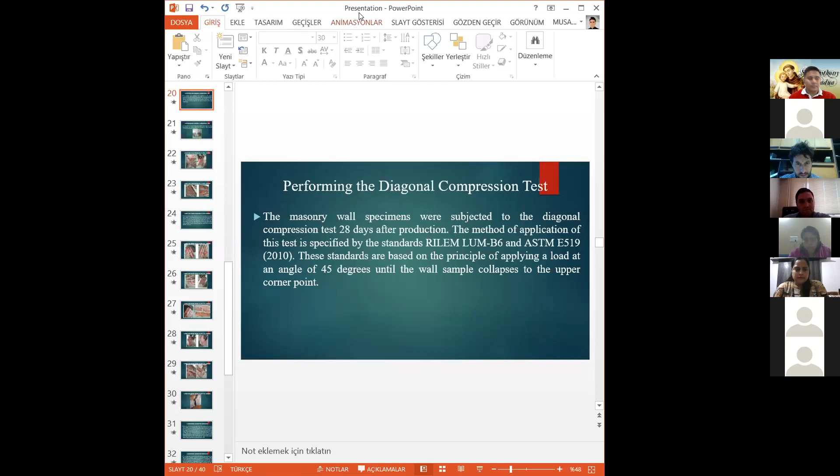The effect of using steel fiber in joint mortar on the failure behavior of masonry walls. I'm Musa Yetkin, research assistant and PhD student at Fırat University in Turkey.

Paper title: The Effects of Using Steel Fiber in Joint Mortar on the Failure Behavior of Masonry Walls, by Musa Yetkin, Yusuf Calayır, and Kürşat Esat Alyamaç.

Abstract: Masonry structures are the structural system in which the walls are load carrying. These structures have a brittle behavior due to the materials that make them up. For this reason, masonry structures or walls exhibit a sudden fracture behavior under lateral loads such as earthquakes. Due to this behavior, many masonry structures have collapsed from the past to the present under earthquakes, and accordingly, loss of life and property has been experienced.

This situation reduced the confidence in masonry structures, and thus the interest in constructing masonry structures gradually decreased. In the study, microsteel fibers were used in joint mortar to reduce the brittleness of masonry structures or to delay their sudden collapse.

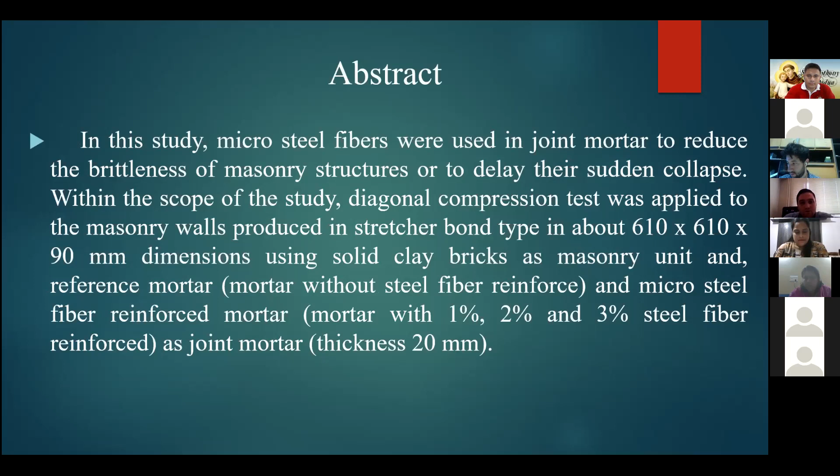Within the scope of the study, diagonal compression test was applied to masonry walls produced in stretcher bond type, using solid clay bricks as masonry unit and reference mortar and microsteel fiber reinforced mortar as joint mortar, with thickness 20 mm. As a result of the test, the behavior of masonry walls was compared with each other in terms of crack shapes and collapse patterns.

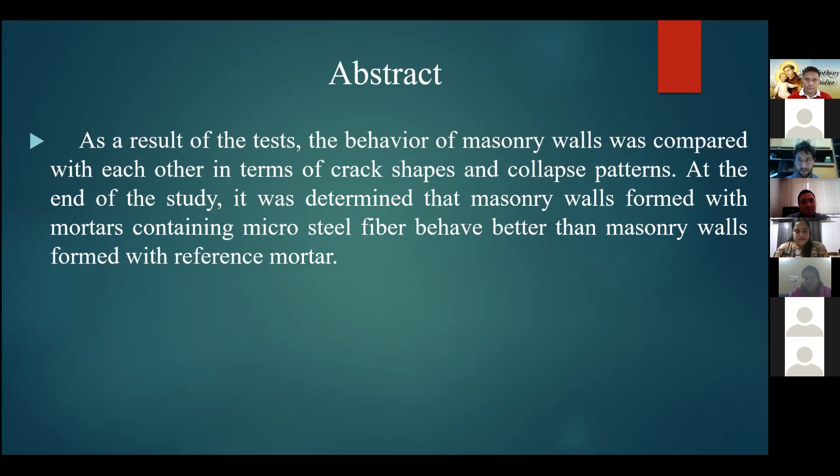At the end of the study, it was determined that masonry walls formed with mortars containing microsteel fiber behave better than masonry walls formed with reference mortar.

Firstly, masonry structures are the oldest structural types that have an important position in human history. These traditional buildings, which have emerged as a result of thousands of years of structural culture, have survived to the present day since they are produced with materials resistant to external influences, and have facilitated our knowledge about their technologies.

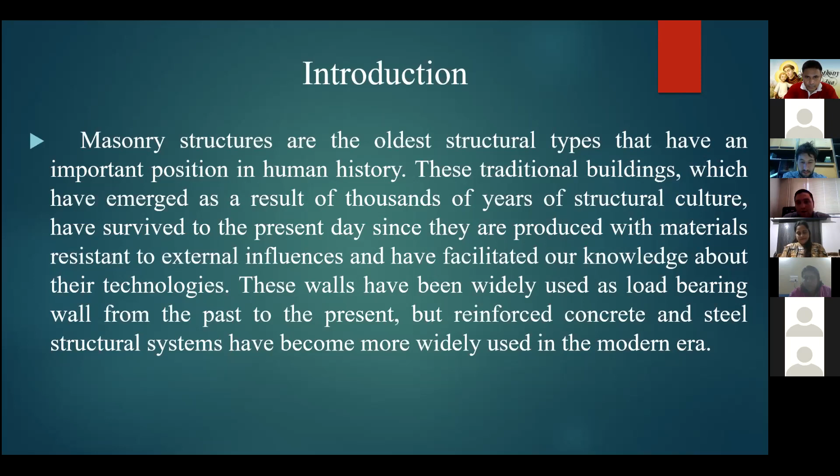These walls have been widely used as load-bearing systems, evolved from the past to the present, but reinforced concrete and steel structural systems have become more widely used in the modern era. Figure: the oldest known structure in history, Göbekli Tepe Temple, Şanlıurfa, Turkey.

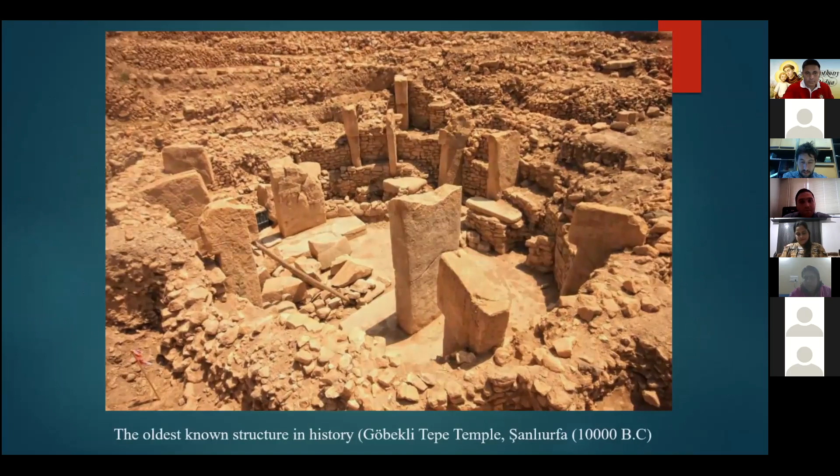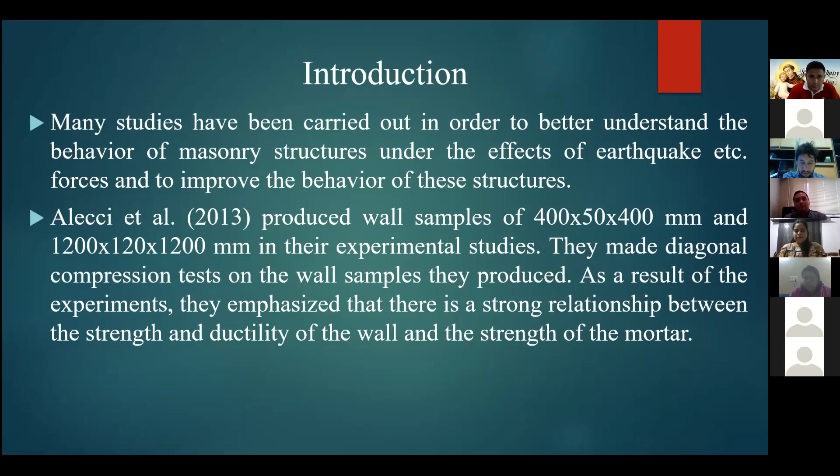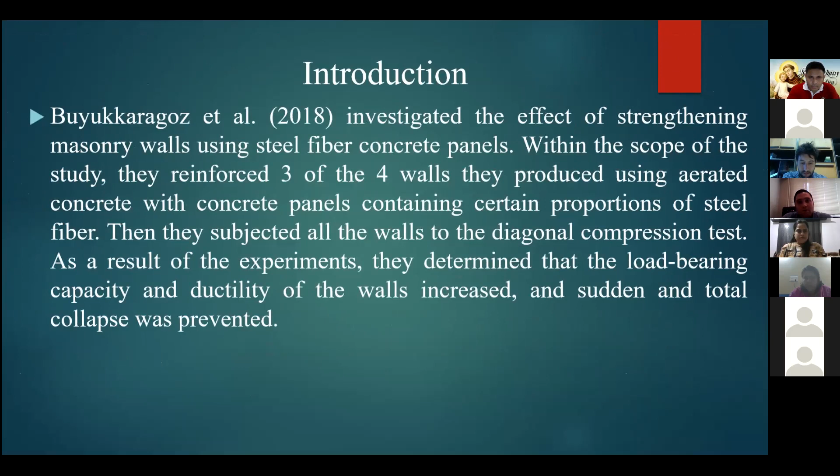Many studies have been carried out in order to better understand the behavior of masonry structures under the effects of earthquake forces and to improve the behavior of these structures. For example, Alecci and Shermi, Dubey and İlki et al., Buyukkaragoz et al., and Mezra and Özsayın, etc. These studies have shown that the improvement of mechanical parameters such as maximum load displacement capability, load carrying capacity, and shear strength that masonry structure can carry is a subject that has been studied and attracted by researchers.

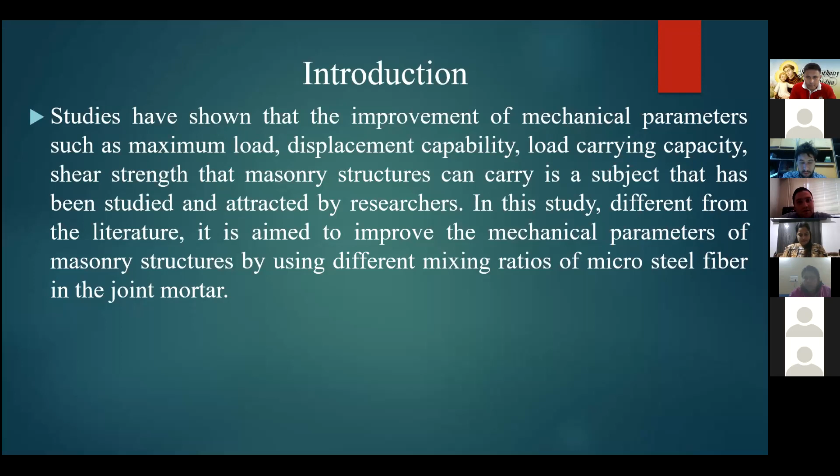In the study, different from the literature, it is aimed to improve the mechanical parameters of masonry structure by using different mixing ratios of microsteel fiber in the joint mortar.

Within the scope of the study, physical and mechanical tests of the materials—brick, sand, cement, microsteel fiber—that will form the masonry wall were carried out. Later, masonry walls were produced using these materials. These walls were subjected to the diagonal compression test after 28 days.

In the process of forming the masonry walls, solid clay bricks were used as the masonry unit. Compressive strength of bricks was determined, along with water absorption and the unit volume weight.

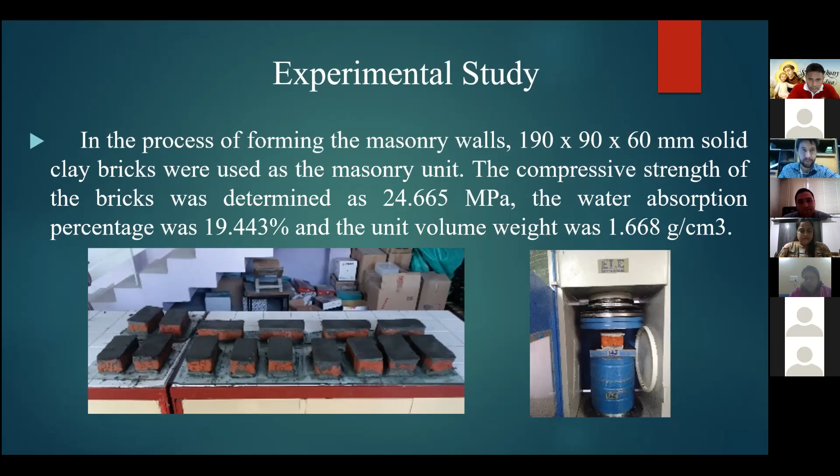Figure shows masonry solid clay bricks in the compression test. Cement, sand, and water were used to create the mortar, which is the material used to form masonry walls by connecting the bricks together.

The mixing ratios of the mortar were chosen as 1, 4, and 0.62 for cement, sand, and water respectively.

In the mortar, CEM I 42.5 R type cement was used as cement, and 0 to 4 millimeter aggregate diameter sand was used as sand. The density of the sand used and the water absorption percentage were also determined.

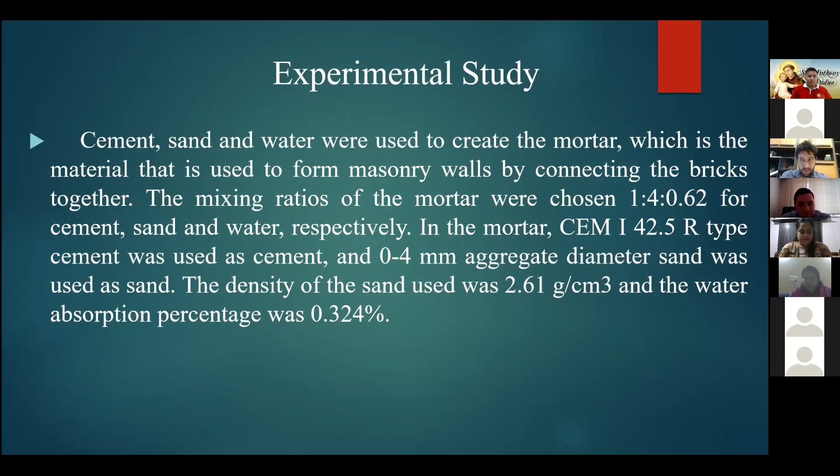In the experimental study, microsteel fiber was used in certain mixing ratios in the mortar. Mortars that don't contain any fiber additives were accepted as reference mortar, and the mortars formed with microsteel fiber at percentages of 1, 2, and 3 were labeled FM1, FM2, FM3. Different mixing ratios of microsteel fiber were used, and the properties of the microsteel fiber used in the study are given in the table.

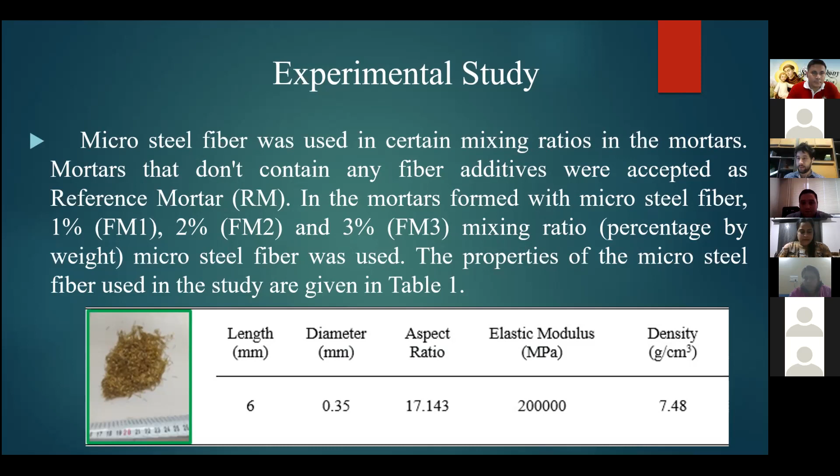The masonry walls were produced using solid clay bricks in the stretcher bond, a single row of approximately 610 by 610 by 90 millimeters. The thickness of the joint mortar for the masonry walls is chosen as 2 centimeters, both vertically and horizontally.

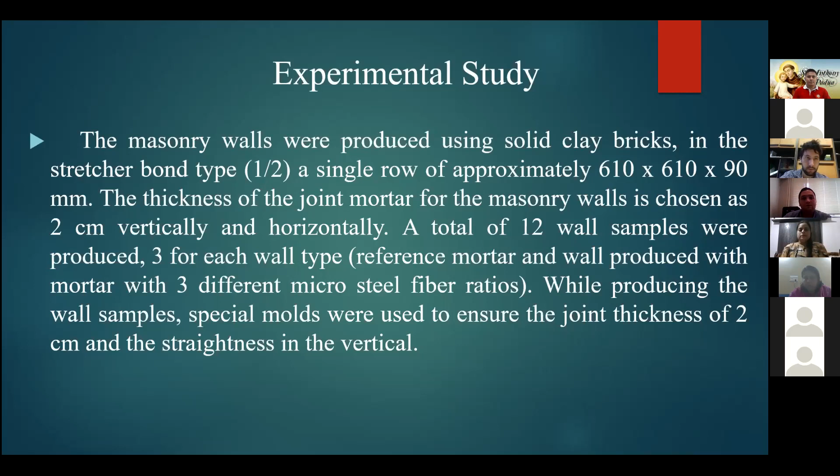A total of 12 wall samples were produced, 3 for each wall type: reference mortar, and walls produced with the 3 different microsteel fiber ratios. While producing the wall samples, special molds were used to ensure the joint thickness of 2 centimeters and straightness in the vertical direction.

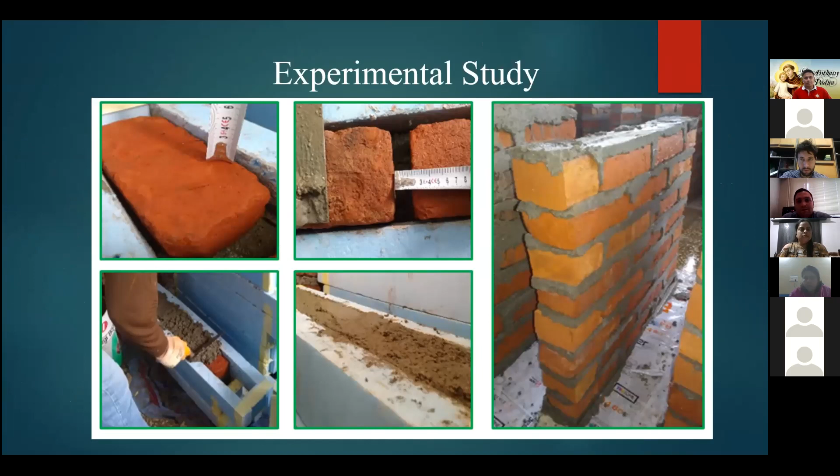Masonry wall specimens in figure. The masonry wall specimens were subjected to the diagonal compression test 28 days after production. The method of application for this test is specified by the standards RILEM and ASTM. The standards are based on the principle of applying a load at an angle of 45 degrees until the wall sample collapses at the upper corner point.

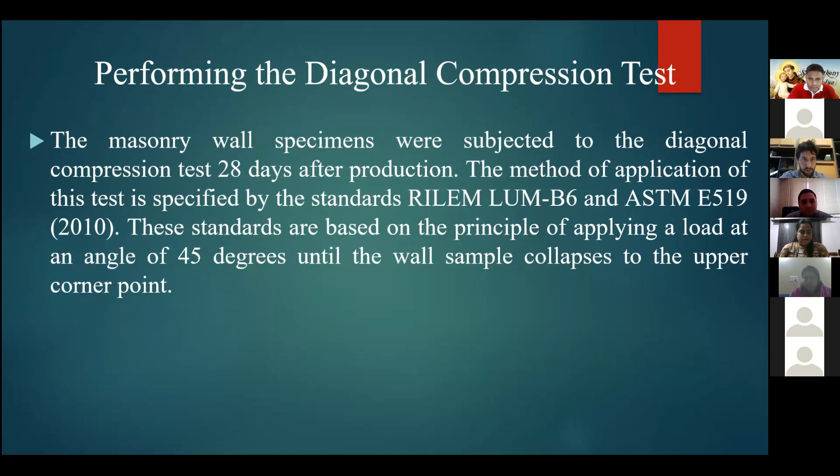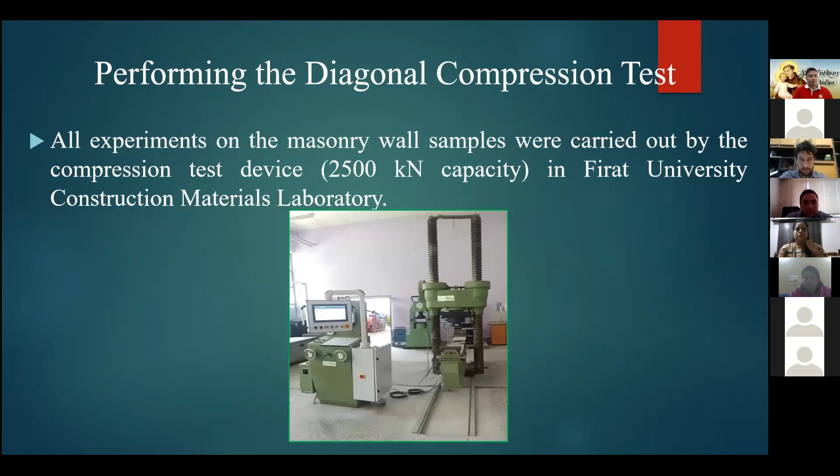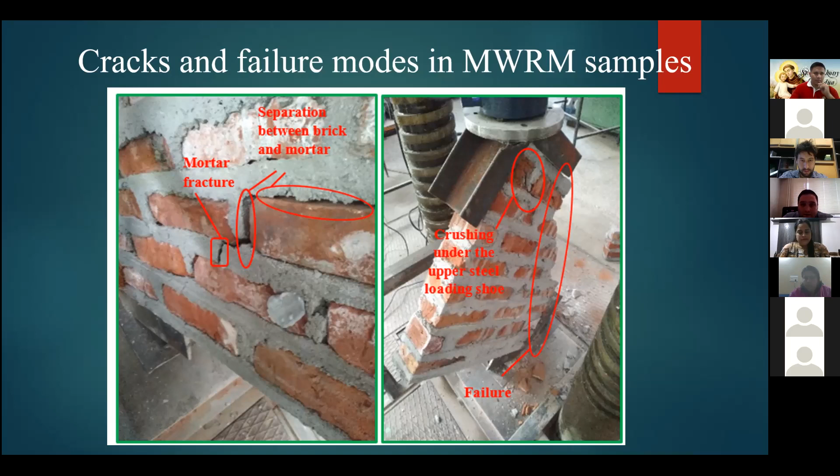Excuse me, sir, you still have 1 minute remaining.

Yes, of course. Diagonal cracks, bricks fracture, and separation between brick and mortar were observed. When the masonry produced with reference mortar was examined after loading, it was determined that cracks occurred along the loading direction on the walls. There were crushes in the brick and mortar at the steel loading shoe where the load was applied, and separations between the joints and the bricks.

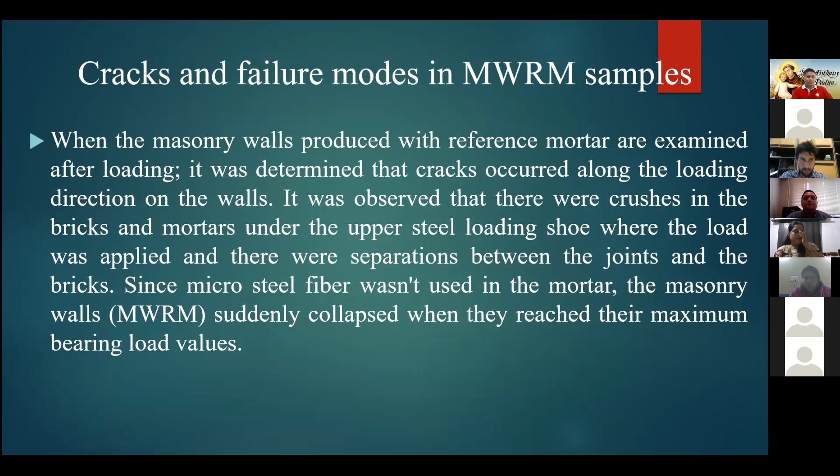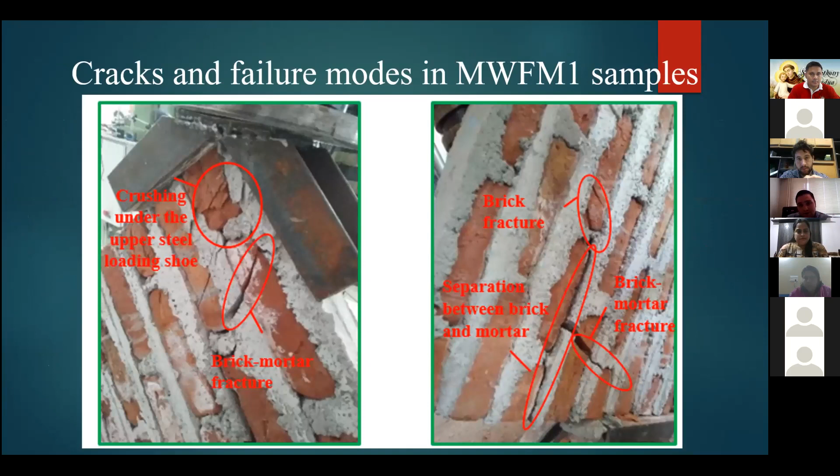Cracks and failure modes in MWFM1: crushing under the upper steel loading shoe, brick mortar fracture and brick fracture, separation between brick and mortar, brick mortar fracture, and partial diagonal cracks.

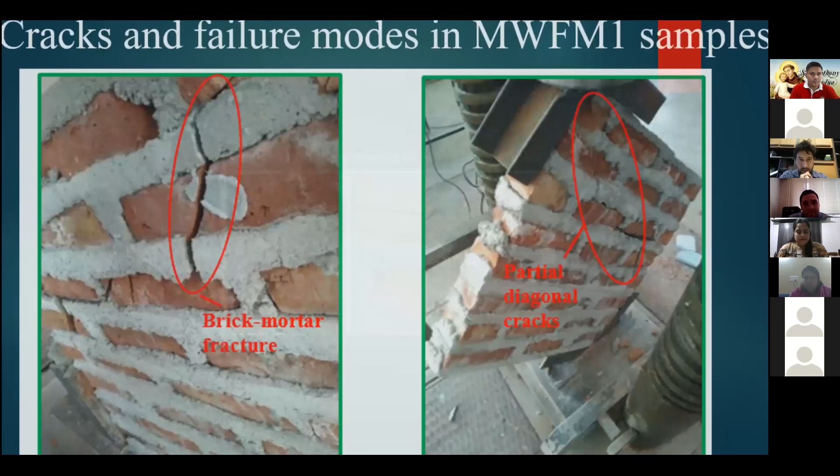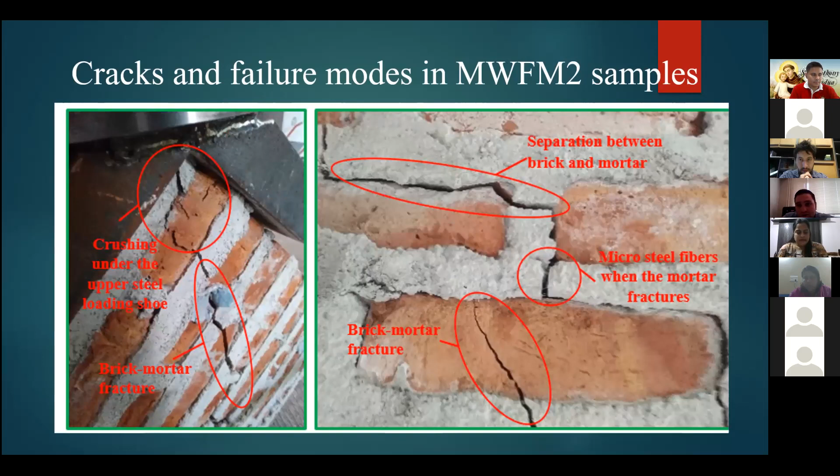In MWFM2 samples: crushing under the upper steel loading shoe and brick mortar fracture, and microsteel fibers when the mortar fractures, separation between brick and mortar.

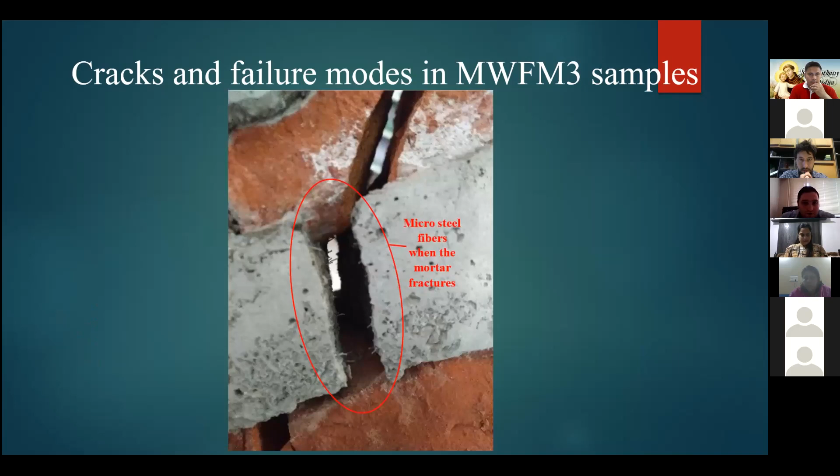In MWFM3: brick mortar fracture, partial diagonal cracks, brick fracture, and microsteel fibers when the mortar fractures.

When the walls formed with microsteel fiber mortars were examined after loading, it was observed that cracks occurred along the loading direction in the walls, but as the amount of fiber in the wall increased, the length of these cracks decreased. The cracks didn't extend from the upper steel loading shoe to the lower steel loading shoe. There were separations between the joints and bricks in some parts of the walls. However, since microsteel fiber was used in the mortar, the samples didn't suddenly fail, and no separation was observed on the walls.

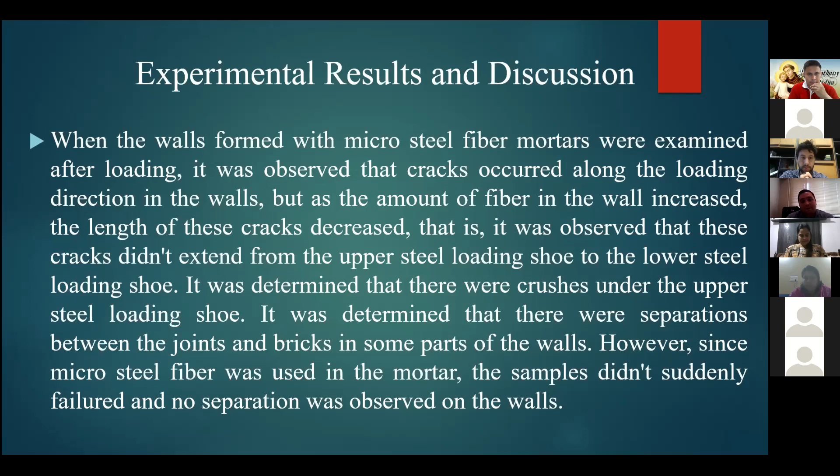Conclusion: within the scope of the study, it was aimed to increase the load carrying capacity of masonry walls and to prevent total collapse by adding microsteel fiber in a certain mixing ratio into the joint mortar in masonry walls.

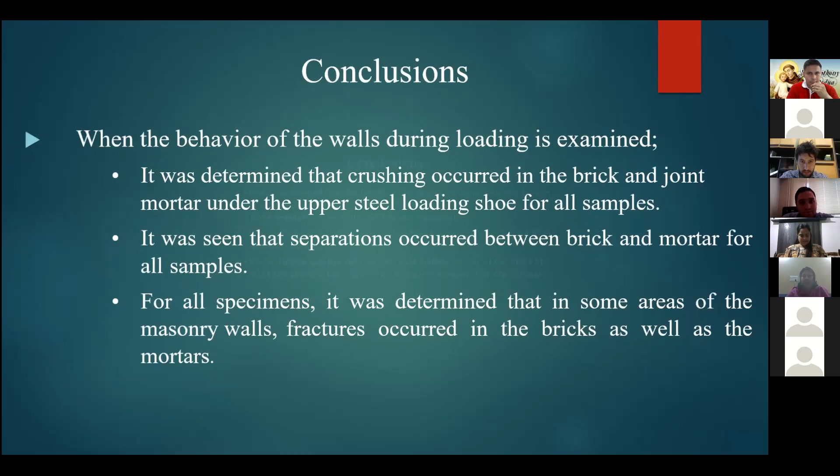When the behavior of the walls during loading was examined, it was determined that crushing occurred in the brick and joint mortar under the upper steel loading shoe for all samples. It was seen that separation occurred between brick and mortar for all samples. For all specimens, it was determined that in some areas of the masonry walls, fractures occurred in the bricks as well as the mortar.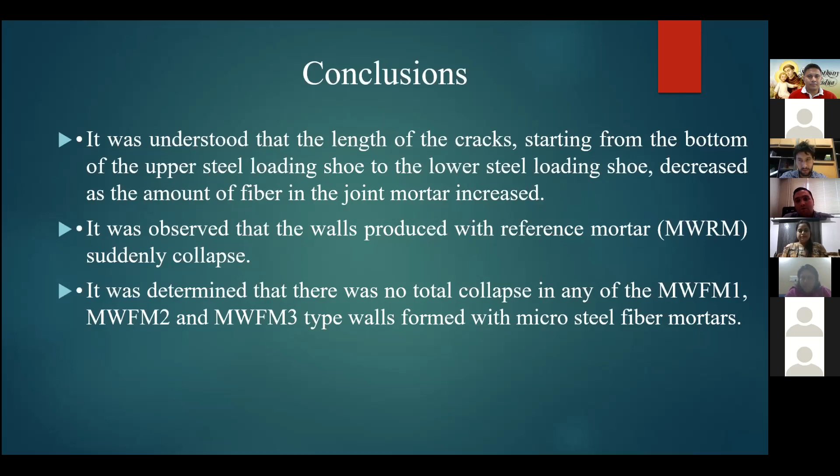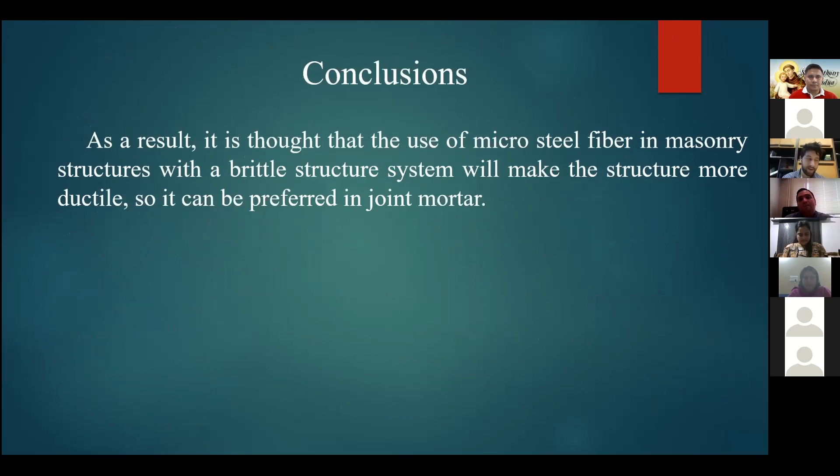It was determined that there was no total collapse in any of the MWFM1, 2, and 3 types formed with microsteel fiber mortars. As a result, it's thought that the use of microsteel fiber in masonry structures with a brittle structure system will make the structure more ductile, so it can be appropriate for use in joint mortar.

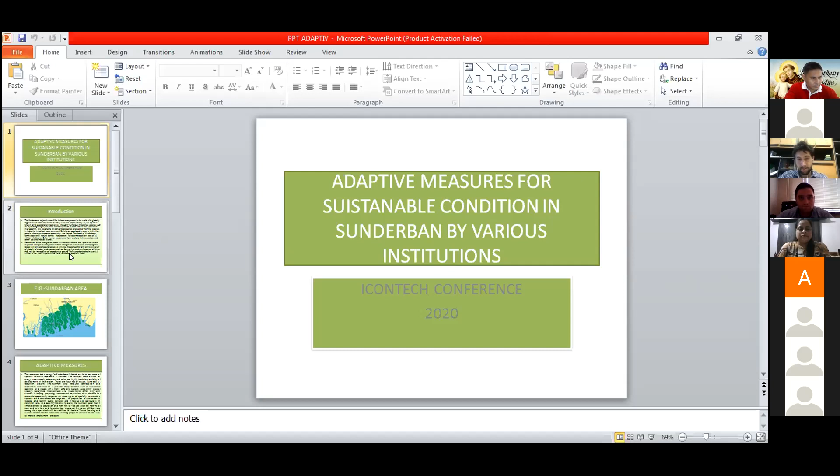Introduction. The Sundarban region is one of the richest ecosystems in the world with globally high levels of floral and faunal diversity. It covers approximately 10,200 square kilometers and is known for exceptional biodiversity, including numerous threatened species such as royal tiger, estuarine crocodile, Indian python, and several species of river dolphins. It is also home to 25% of bird species and 10% of mammal species in India, and is considered a natural heritage site of the world.

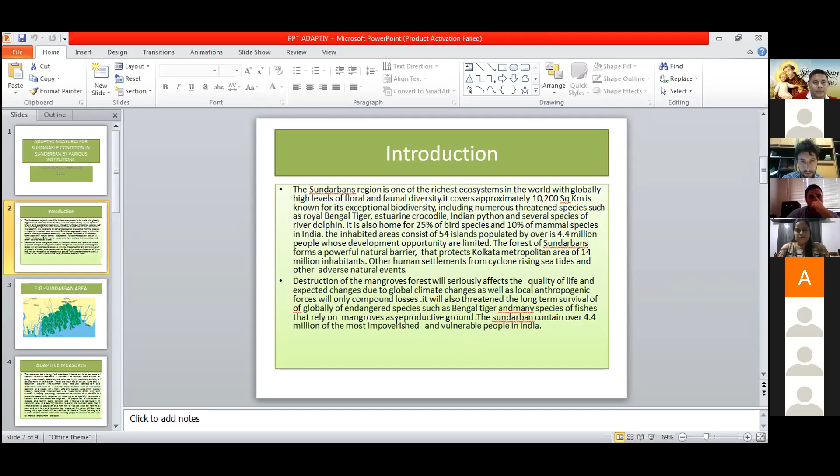The inhabited areas consist of 54 islands populated by over 4.4 million people whose development opportunities are limited. The forest of Sundarban forms a powerful natural barrier that protects the Kolkata metropolitan area of 14 million inhabitants, and other human settlements, from cyclones, rising sea tides, and other adverse natural events. Destruction of the mangrove forest will seriously affect the quality of life, and the expected changes due to global climate change, as well as local anthropogenic forces, will also cause compound losses. It will also threaten the long-term survival of globally endangered species such as the Bengal tiger and many species of fish that rely on mangroves as a reproductive ground.

This is the figure showing the Sundarban area.

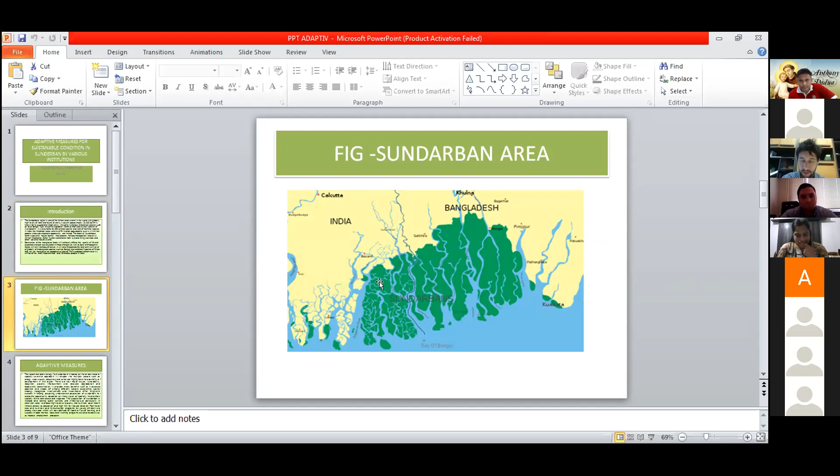Adaptive measure. The recommended strategy for Sundarban is based on a cross-sectoral, spatially sensitive approach. It includes multiple sectors such as energy, water supply, education, and others, highlighted in the possibility of development of the region. There are four major issues: vulnerability reduction, poverty improvement, resource degradation, and biodiversity conservation. It provides many benefits, such as assessing the potential and trade-offs among different sectors, an overarching spatial strategy, recognized intervention and investment, and decade-long success in helping prepare the underserved population of Sundarban.

People for economic opportunity depend on three types of spatial intervention: spatially blind, connected, and targeted. The population of Sundarban is in a transition zone and faces high levels of poverty, malnutrition, poor health, limited access to education, and high risk from natural disaster. Postnatal care, nutrition, and immunization programs for young children are among the steps which will stabilize the basis for future learning and success in the labor market.

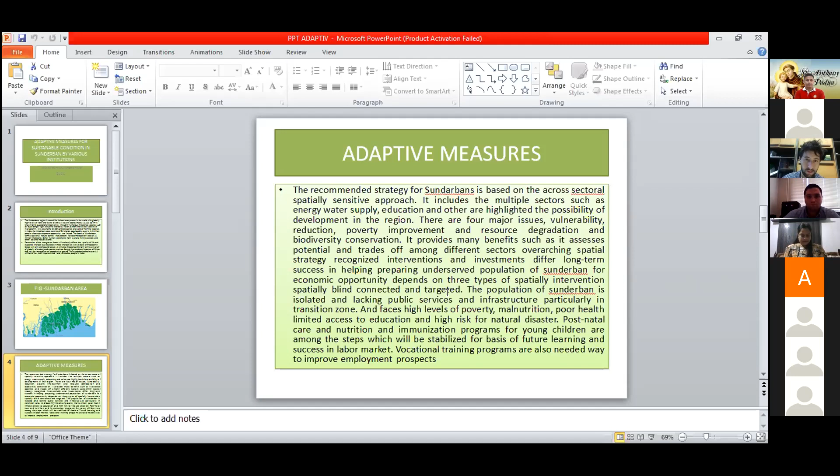Methods. Various national and state level development administrators and agencies are active in Sundarban. This region contains a national park with multiple zones associated with statutory conservation and development requirements, and thus there are numerous central agencies present with mandates and activities concerning matters ranging from coastal issues to market funding. There are 19 different government of West Bengal agencies that have formal mandates to implement one or more programs in Sundarban. The Department of Sundarban Affairs has a specific policy that recognizes regions' terrain, poverty, and accessibility issues.

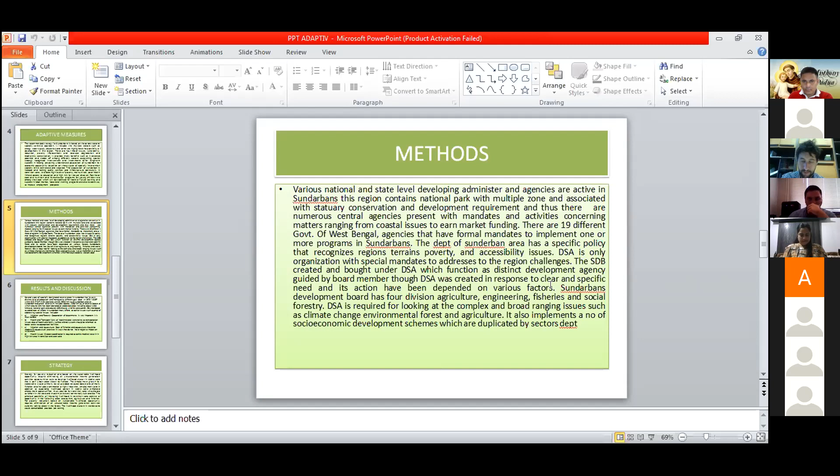DSA is the only organization with a special mandate to address the region's challenges. The Sundarban Development Board is created and brought under DSA, which functions as a distinct development agency guided by board members. So DSA was created in response to a clear and specific need, and its actions have been dependent on various factors.

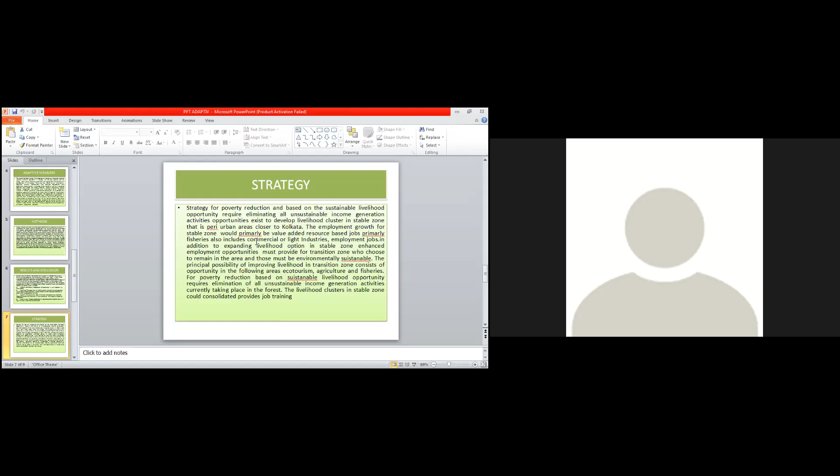Strategies for poverty reduction based on sustainable livelihood opportunity require eliminating all unsustainable income generation activities. Opportunities exist to develop livelihood clusters in the stable zone, that is, peri-urban areas closer to Kolkata. The employment growth for the stable zone would primarily be value-added resource-based jobs, primarily fisheries, also including commercial or light industries. In addition to expanding livelihood options in the stable zone, enhanced employment opportunities must be provided for the transition zone for those who choose to remain in the area, and these must be environmentally sustainable.

The principal possibilities of improving livelihood in the transition zone consist of opportunities in the following areas: ecotourism, agriculture, and fisheries. Poverty reduction based on sustainable livelihood opportunity requires elimination of all unsustainable income generation activities currently taking place in the forest.

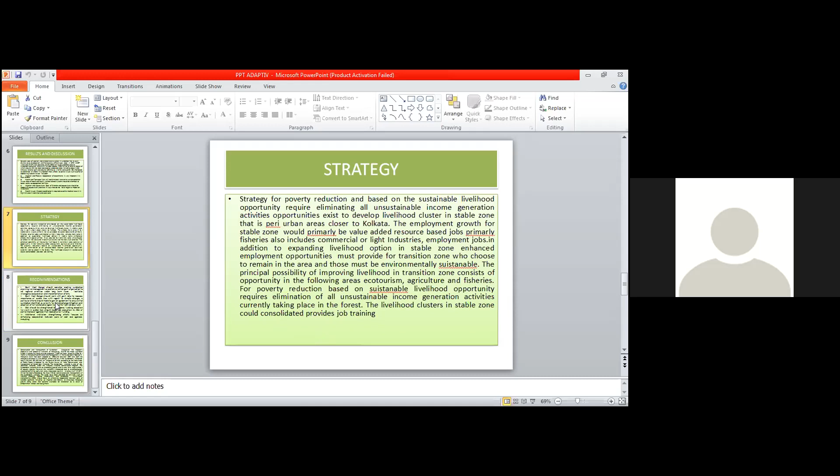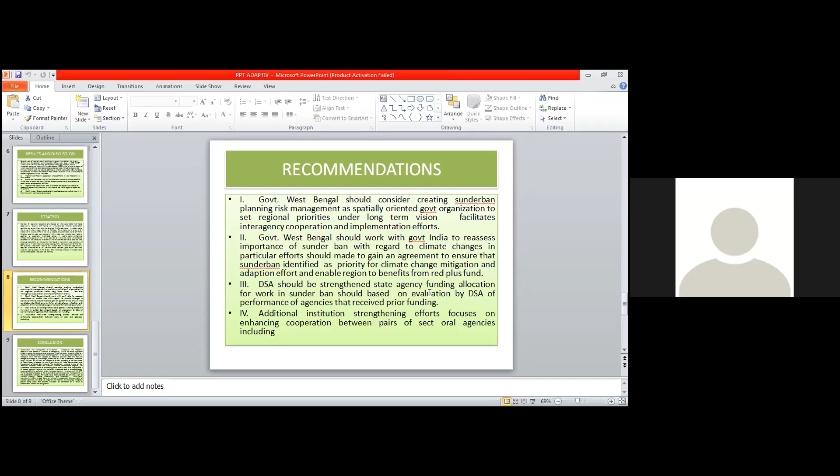Government of West Bengal should work with Government of India to reassess the importance of Sundarban with regard to climate change. In particular, efforts should be made to gain agreement to ensure Sundarban is identified as a priority for climate change mitigation and adaptation efforts, and enable the region to benefit from REDD+ funds.

DSA should be strengthened. State agency funding allocation for work in Sundarban should be based on evaluation by DSA of the performance of agencies that received prior funding.

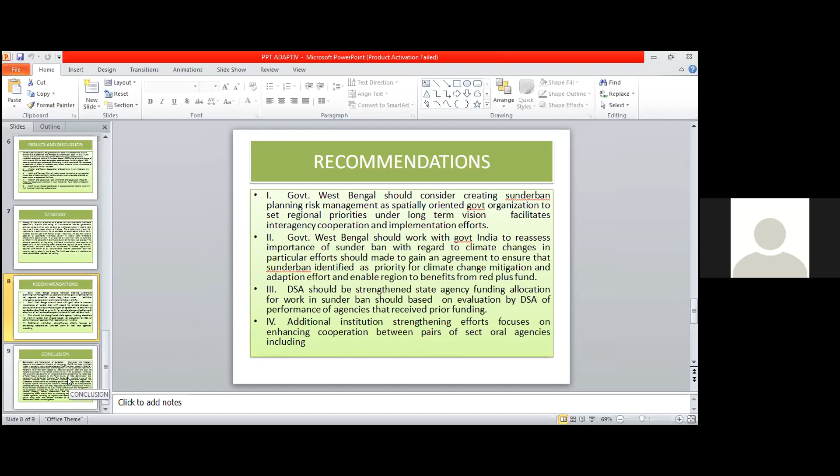Additional institution strengthening efforts focus on enhancing cooperation between pairs of sectoral agencies, including forestry, agriculture, fishing, etc. Now, with that point, I'm concluding my paper here.

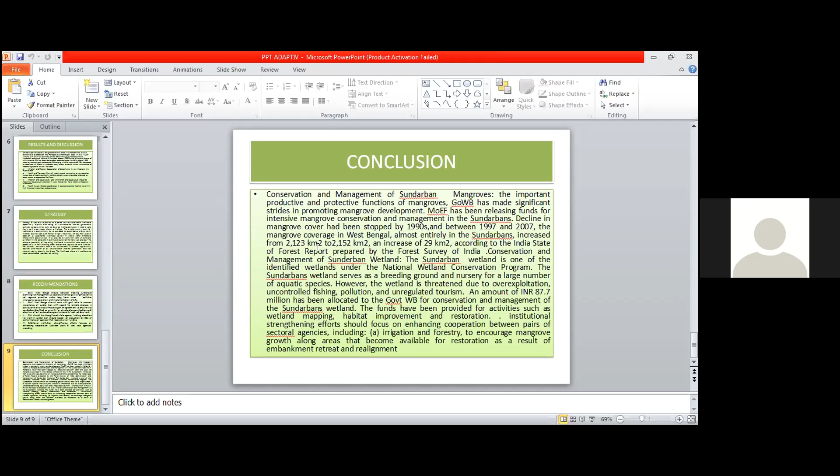Decline in mangrove forest cover had been stopped by the 1990s, and between 1997 and 2007, the mangrove coverage in West Bengal, almost entirely in the Sundarban, increased from 2,123 square kilometers to 2,152 square kilometers, an increase of 29 square kilometers, according to the India State of Forest Report prepared by the Forest Survey of India.

Conservation and management of Sundarban wetland. The Sundarban wetland is one of the identified wetlands under the National Wetland Conservation Program. The Sundarban wetlands serve as a breeding ground and nursery for a large number of aquatic species. However, the wetland is threatened due to overexploitation, uncontrolled fishing, pollution, and unregulated tourism.

An amount of 87.7 million has been allocated to the Government of West Bengal for conservation and management of the Sundarban wetland. The funds have been provided for activities such as wetland mapping, habitat improvement, and restoration.

Institutional strengthening efforts should focus on enhancing cooperation between pairs of sectoral agencies, including irrigation and forestry, to encourage mangrove growth along areas that become available for restoration as a result of embankment retreat and realignment.

Thank you. I'm concluding here. Thank you.

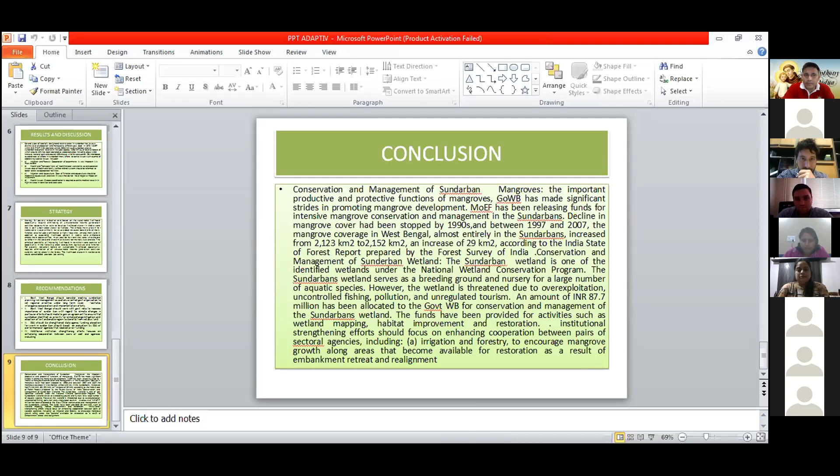So, hello everyone. My name is Hussam. I'm a PhD student at Miskolc University in Hungary. Today I'm going to present the microstructure change of different welded advanced high strength steels after flame straightening.

We're going to share the experiment results for three different advanced high strength steels and the microstructure change and mechanical behavior of those materials. First, I'm going to start with a small introduction, materials used, and experiment procedure, then the experiment results received, and a small conclusion as well.

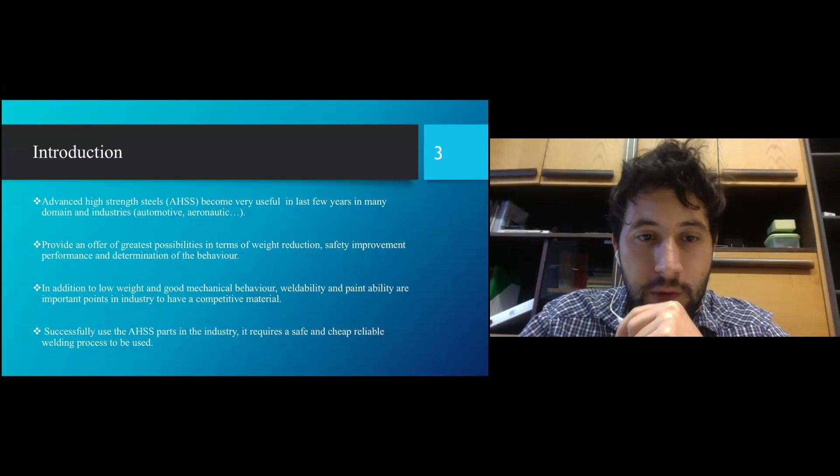In the last few years, advanced high strength steel has become very useful in many domains and industries, such as automotive and aeronautic industries. Why? Because of its potential for weight reduction, safety improvement, and performance, as well as its good mechanical behavior, weldability, and paintability. These are important points for industry.

Why? Because welding is the most important method used for joining materials. And for those materials, after welding, several defects can occur. One of the most common deformations received after welding for this kind of material is longitudinal shrinkage, transversal shrinkage, or angular distortion.

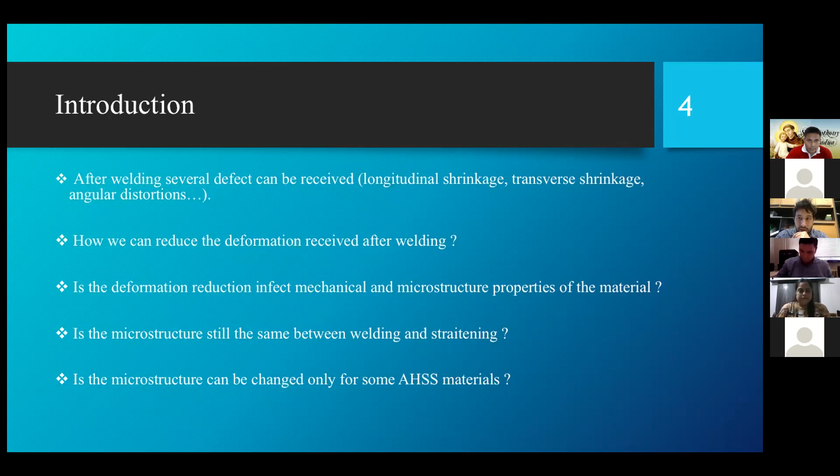For us, we're going to try to weld three different advanced high strength steels. We're going to check the deformation received after welding, the mechanical and microstructure properties after welding and after straightening, and finally we're going to check the microstructure change for those welded materials after flame straightening.

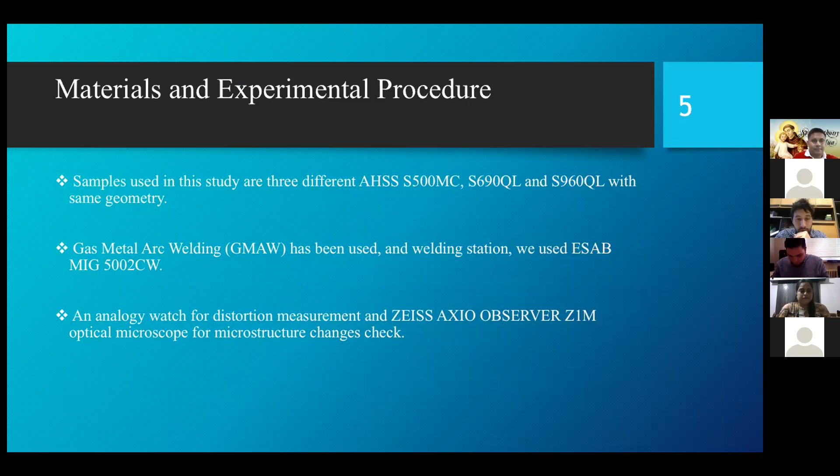So we used 3 different advanced high strength steels: S500MC, S690, and S960. For all of them it's the same geometry, and we use GMAW welding, one of the common welding methods, and optical microscope for microstructure checks.

As I mentioned, we used 3 different advanced high strength steels. After welding, we cast all 3 of them to check the microstructure change for the different materials. We concluded that there is a microstructure change in the heat affected zone for all 3 materials.

For the first one, the S500MC, we received typical microstructure change in the heat affected zone, and also some acicular bainite and quasi-pearlite structure affected in the same zone for S500MC.

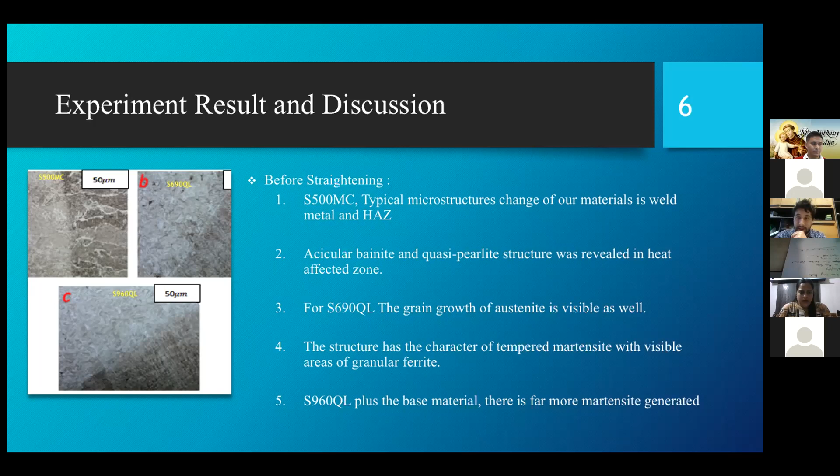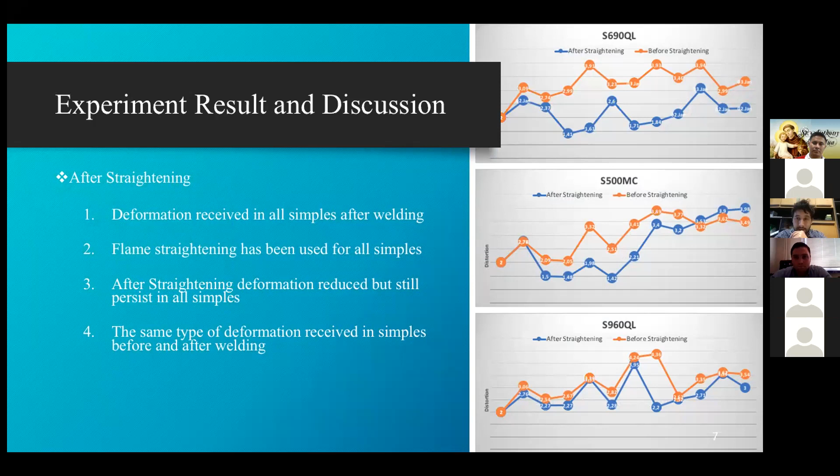As we can see, the same type of deformation has been received, the buckling deformation, for all of them. The next step right now is to check the microstructure after flame straightening for all of our materials.

As we checked in the microstructure after the straightening of all our materials, the main microstructure received after welding persists, and the number of microstructure correlated grain size does not change as well.

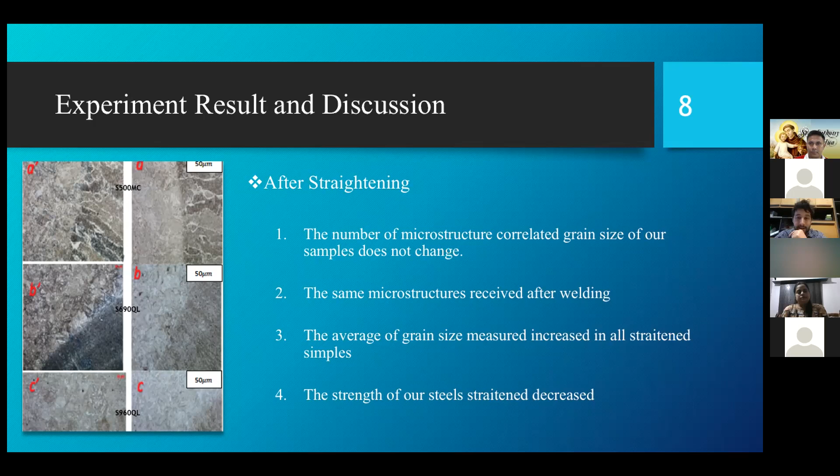The average grain size measured increased in our samples, which can affect the strength of our straightened steel. That means the strength of the material after the straightening decreased.

As a small conclusion, we can conclude that the microstructure change for all these types of materials does not persist after the straightening, and the same deformation has been received for all of the materials using the GMAW welding.

Also, the average grain size increased for all of them, meaning the strength of our material decreased in all those types of materials, and the microstructure changes have been received for all of them only in the heat affected zone.

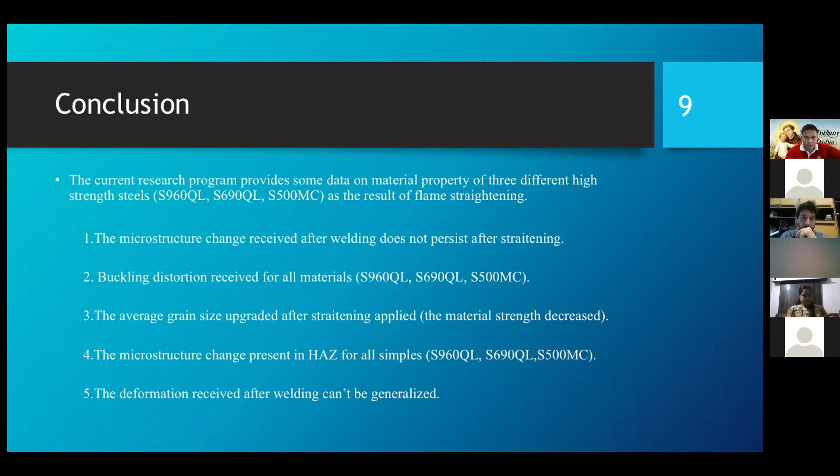Also, the deformation after welding cannot be generalized, so different deformation has been received for all the materials. I think this is all for my presentation, and if you have any questions, I'm here to answer.

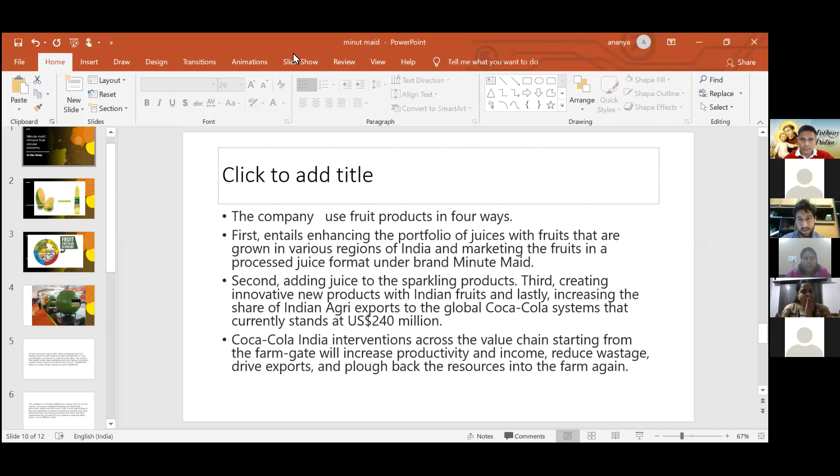Visible? Yes. So, Minute Maid's virtuous fruit circular economy. Minute Maid is from Coca-Cola. So how do they help in this virtuous fruit economy? They have food processors, the Coca-Cola system, and community farmers, and that leads to a fruit circular economy.

How do they do it? They have done it in the form of beautiful advertisements. So what is this circular economy? It reintegrates food, technology, and energy production with water and waste management. It generates jobs and income in rural and urban areas. This has created wealth that stays within the local and regional economy. Transformation towards a relocalized food system significantly helps address climate change and other challenges.

The challenge is to design a resilient food system with citizens, to reduce ecological footprints and foster local community democratic control over the means of life. Rather than just localizing food and agriculture in isolation, we need to consider how we can integrate food and energy production with water and waste management in a diversity of local contexts in rural areas at different scales.

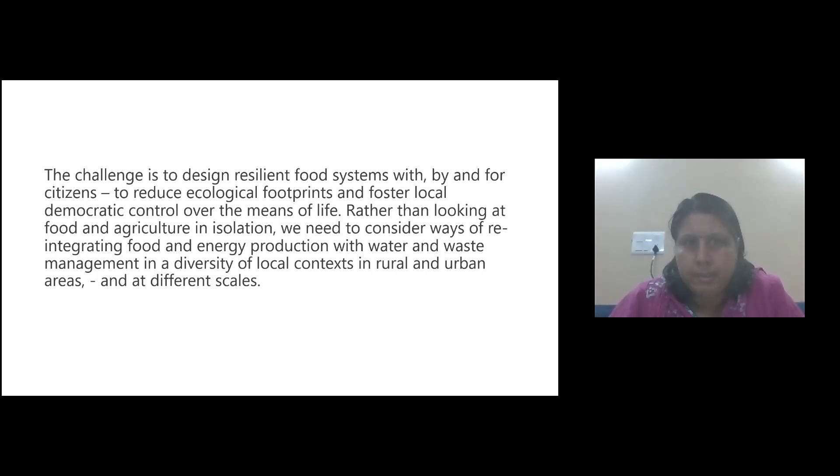So Coca-Cola has come up with this circular fruit economy where they are working on this Minute Maid project. How do they work on this? They have demo farms, more resistant high yield varieties, drip irrigation, high tech training programs, ultra high density plantation techniques, even crop distribution that helps in price stability, localized procurement, and assured payback.

That's a win-win situation for the farmer and the company both. Better standard of living and livelihoods because of this circular economy. And they have modern nurseries which help and motivate the farmers and people.

So this is the Unnati intervention which Coca-Cola is doing in India. 95% of the local produce agriculture ingredients they are using there, and USD 1.7 billion investment they have for the first phase. They started in 2017.

First, it entails enhancing the portfolio of juices with fruits that grow in various regions of India, and marketing the fruit processed juice format under the brand name Minute Maid.

Second, adding juice to sparkling products. Third, creating innovative new products with Indian fruits. And lastly, increasing the share of Indian agri exports to the global Coca-Cola system, which currently stands at US dollar 240 million.

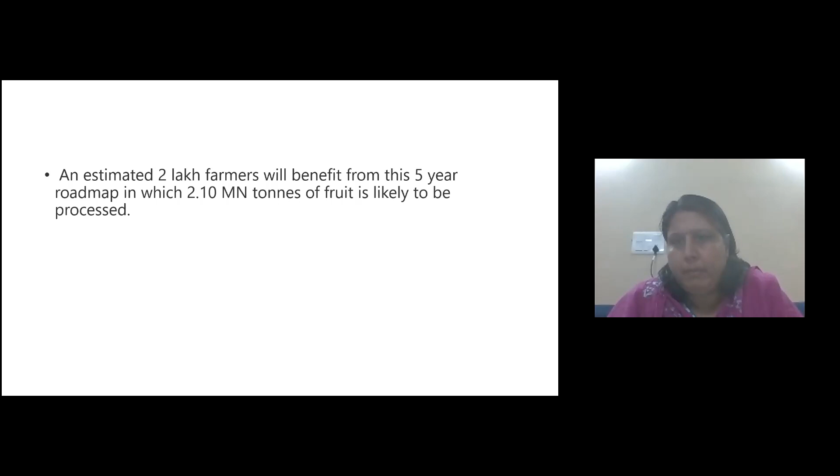So this is all from my side. After Coca-Cola did this project, many other companies are also coming up with this virtuous circular economy so that the farmer is happy. Basically, India is an agricultural country, so it gives a boost to the economy in that way, by procuring raw material and maximum utilization of resources.

That was all from my side. Thank you.

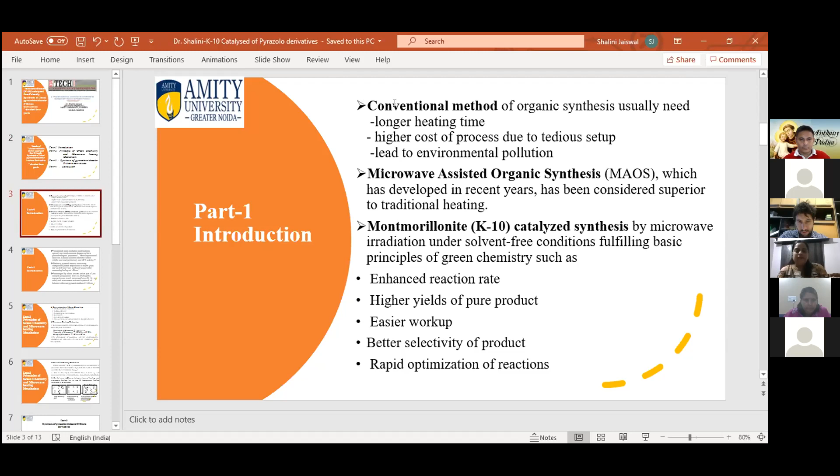One is the conventional method, which is a very old method for synthesizing a compound, but it has some drawbacks. It requires a long time, and at the same time there is a requirement for a proper setup. And one important drawback is that it tends to pollute the environment.

To remove such drawbacks, we are now moving to a new technology that is called microwave assisted organic synthesis.

This method is basically going to solve all these drawbacks as much as possible. In this method, we are going to synthesize a compound with the help of microwave radiations. What are the advantages of this method? The advantage of this method, when we synthesize a compound through microwave assisted organic synthesis, is...

The first advantage is that it is eco-friendly. Second, the yield of the pure compound is very high. Second point is the rate of reaction. If the compound is synthesized through conventional methods, it takes time in hours, but in the case of microwave assisted method, the time required is in minutes. So there is a large difference in reaction rate.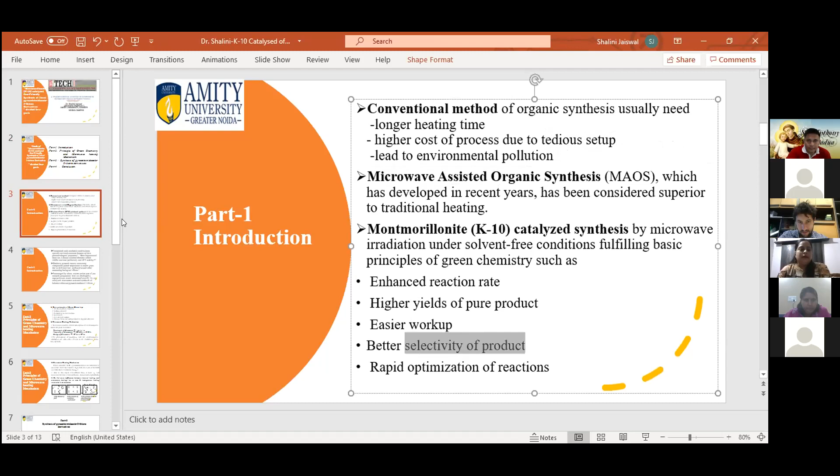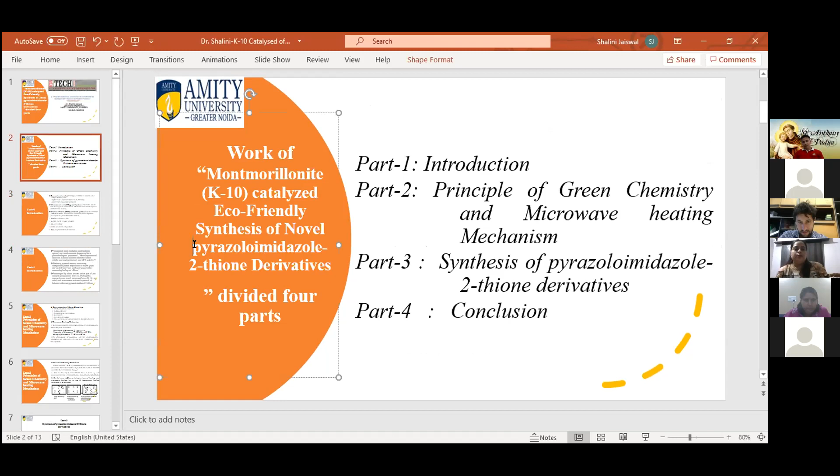Now moving to the second part, which represents why I am going to synthesize this compound, pyrazolo-imidazole-2-thione. What are the advantages for synthesizing this compound? The advantage is that this compound has a very renowned, well-known antimicrobial activity.

What is the reason behind this antiviral or antimicrobial activity? When we combine pyrazole with another heterocyclic compound, they enhance their antimicrobial activity. That's why we are choosing this compound. For the synthesis of this compound, we are using Montmorillonite K10 as a solid support.

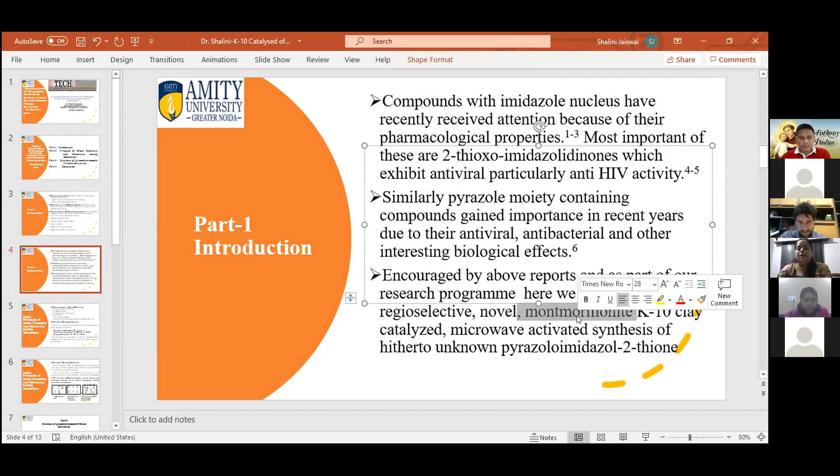Next part is basically the principle. What is the basic principle? We can say that the basic principle is exactly the reason behind using microwave assisted synthesis.

These are basically the principles of green chemistry: selectivity, eco-friendly nature, along with enhancement of yield and milder reaction conditions, and importantly, a reduction in reaction time. I already told you that in this mechanism we are going to use microwave reaction. These are basically their wavelength, frequency, and energy of microwave. So this is basically the principle.

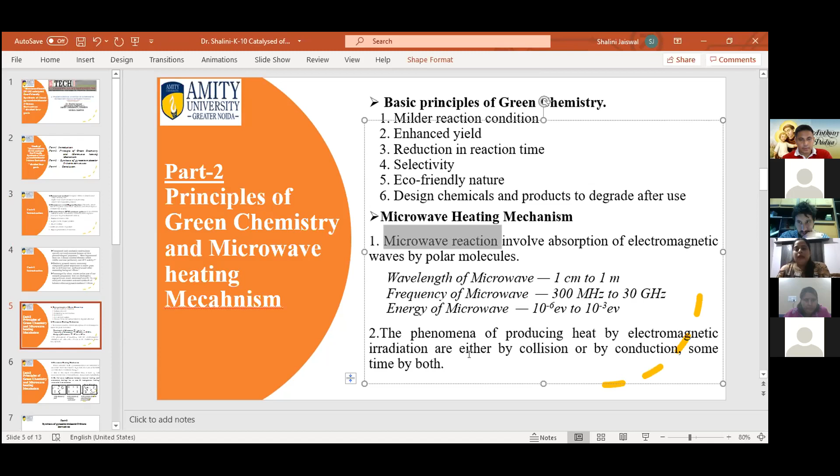Now I'm going to explain in which way microwave converts reactant to products. This is basically a microwave heating mechanism. The important thing is, when we place a compound in any instrument or apparatus that has microwave radiation, that microwave radiation is going to directly interact with the molecules or atoms, and directly hit those molecules.

Due to this, these atoms or molecules directly absorb that radiation, and there is time lag. So due to this effect, the reactant is directly going to convert into the products. So due to this, there is a very small requirement of time, and the time is reduced.

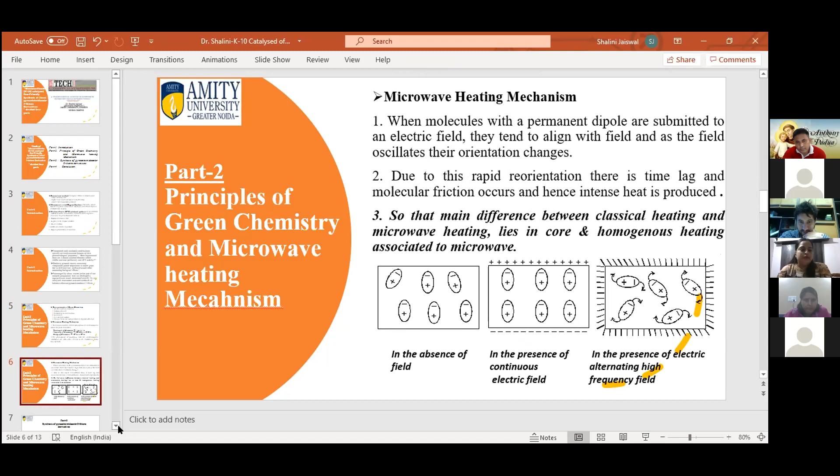So I'm moving to the next slide. This is a major part, or you can say what exactly I'm doing in this research. This is a scheme by which I'm going to synthesize my compound. This is the final compound. So what am I basically doing here?

In this scheme, basically first we are going to mix this compound. This is an explanation of this compound. We are going to mix aryl thiourea with chloroacetic acid along with the aromatic aldehyde, and we are using Montmorillonite as a solid support. We are going to mix all these in a solvent, and when the compound is completely mixed, we are going to evaporate all the solvent to avoid any kind of pollution to the environment.

So by the help of this instrumentation, I'm going to check whether the reaction is going to complete or not. If the reaction is not completed, then we are again going to put the same mixture in a microwave, and continue for 2 minutes until the reactant is going to convert to the products. So by this way, we are going to synthesize this compound.

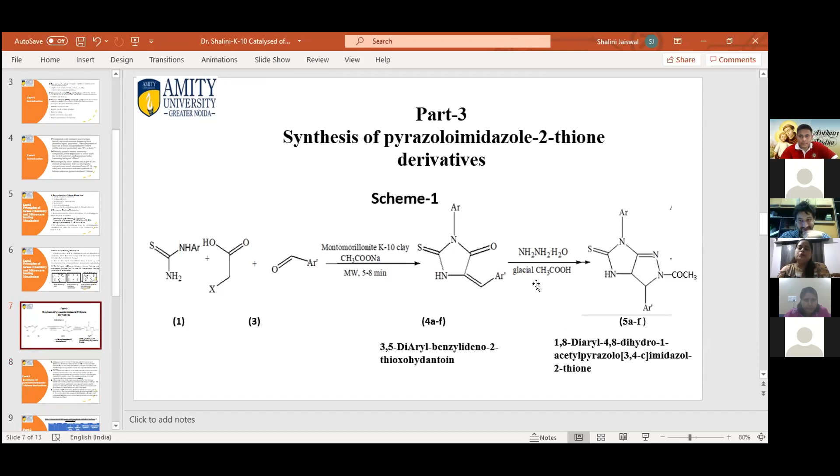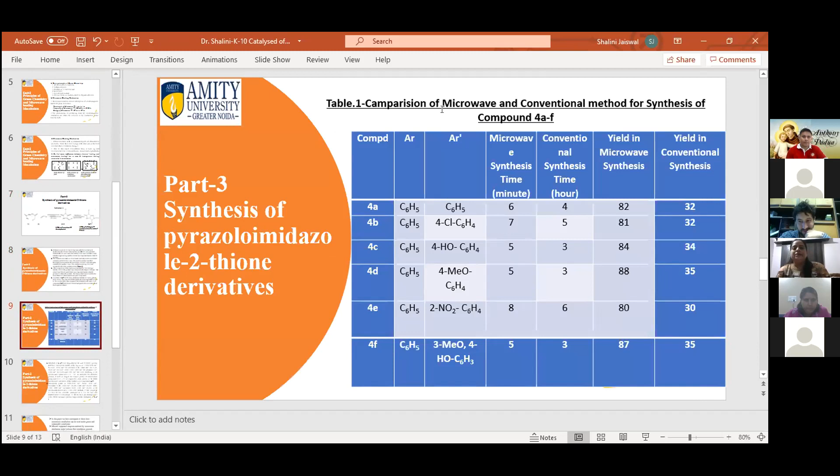So this is basically the procedure, and this is the most important part, showing why we are using this microwave method and how this microwave method is better as compared to the conventional method. These are different aromatic compounds we are using in the synthesis of the compound. And this is a comparison when we compare the microwave method with the conventional method.

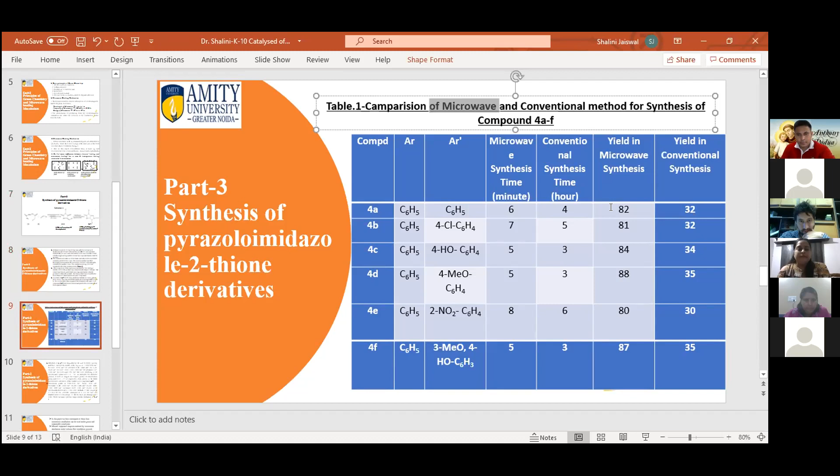In the microwave method, you can see that the time required is in minutes, but in the case of the conventional method, time is required in terms of hours. Second, when we compare on the basis of yield, you can clearly see that in the case of microwave, the yield is in the range of 80s, but in the case of conventional method, yield is very low. So that's why we opted for this method for the synthesis of pyrazoloimidazole-2-thione derivatives.

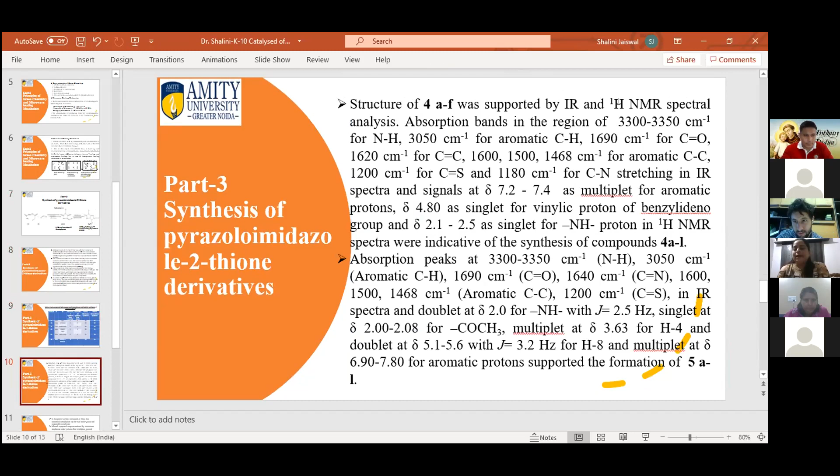And this is basically, as I already told you, how the structure is identified, how we can find out that the compound we synthesized is exactly the same. So we use different methodologies: infrared technology, proton NMR technology, along with UV-IR technology, to find out the exact structure of the synthesized compound.

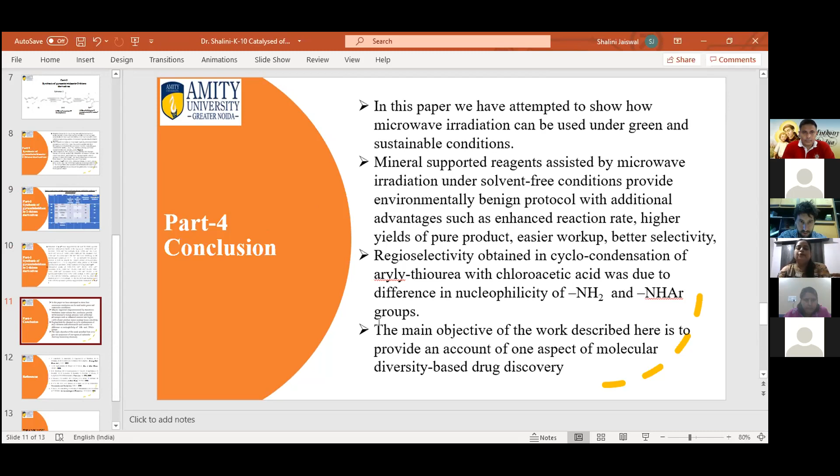Thank you, Doctor, for that nice presentation. So, do you have any questions with regards to her presentation? Do you have any questions? So, if none, I think that is the last presenter.

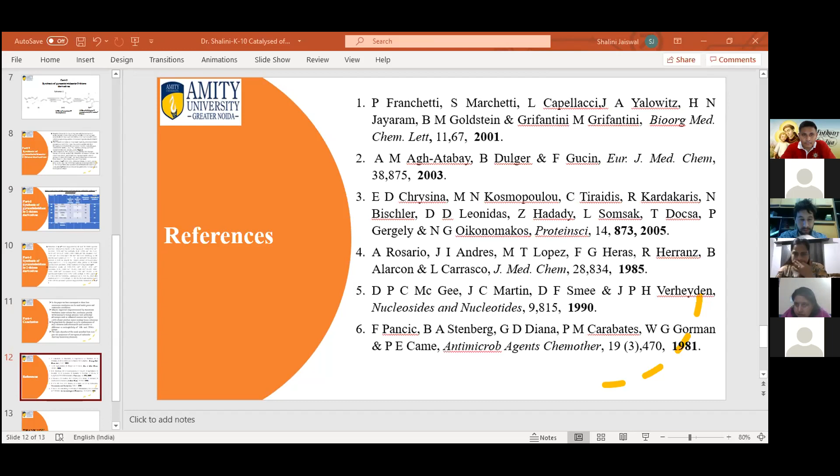She will send it right away. So please check again later. And thank you all. Okay, take good care and goodbye. Thank you, Samira, and thank you, everyone. Thank you, everybody. Bye. Bye. Goodbye. Bye.